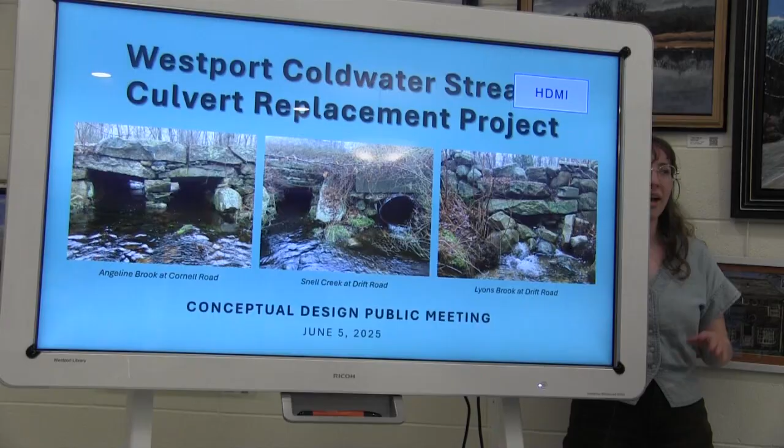Great. It looks like the screen hasn't connected here. What should I do? Oh, if you hit the input, the bottom button right here. Oh. I guess we operated here. Do you stand out there? I think if you just stand back here. Okay. Yeah, back here.

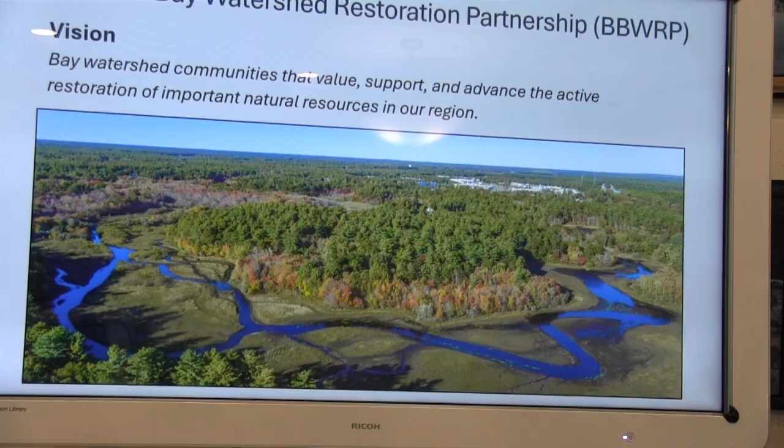I want to give a little bit of an intro of how this project came to be and what got us to this point. So this project is part of the Buzzards Bay Watershed Restoration Partnership. It's a bit of a mouthful, so you'll hear me refer to it as the partnership. Our goal is to see Bay watershed communities that value, support, and actively advance restoration of important natural resources in the region.

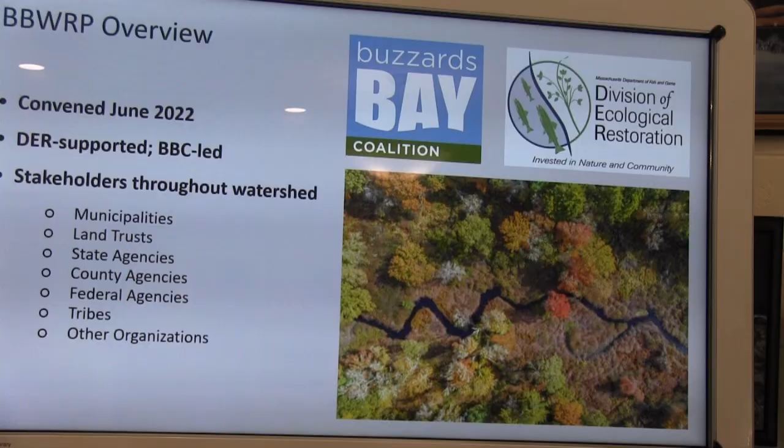So the partnership began in June of 2022. It is led by the coalition and supported by DER, which is the Massachusetts Division of Ecological Restoration. But the real meat of this partnership is all of the stakeholders that are involved. So we have municipalities, land trusts, state agencies, county agencies, federal agencies, tribes, and other organizations. And in each project, it's a different set of partners, but many of them overlap, and they all help to raise up those projects, and we look for ways that we can work hand in hand.

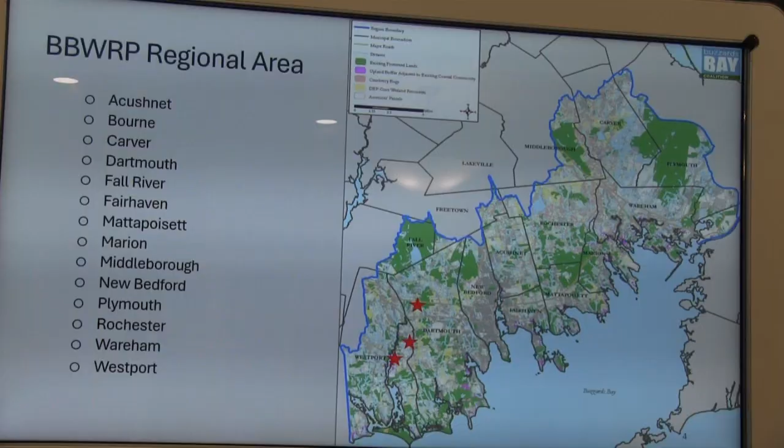So when this partnership was started, we're looking through the Buzzards Bay regional area, so anywhere in the watershed where water is eventually ending up into the bay. So this is all the towns shown on the map, and we looked specifically for two things that entered into what we call a prioritization model to show us what kind of projects rose to the top. So the first thing is we're looking at the restoration potential of these projects. For example, in Westport, in these cold water streams, we have really great opportunities for fish passage, specifically American brook trout. And that brought us to an ecological restoration standpoint.

But the second thing that really is part of the prioritization model is looking for partners such as the town of Westport who are looking for projects that are a priority on their end as well. So with these three culverts, they are in different stages of deterioration, and so it's one of the priorities for the town as well. And so those two things brought these three culverts to some of the top culvert replacements in the region. And so, you can advance it.

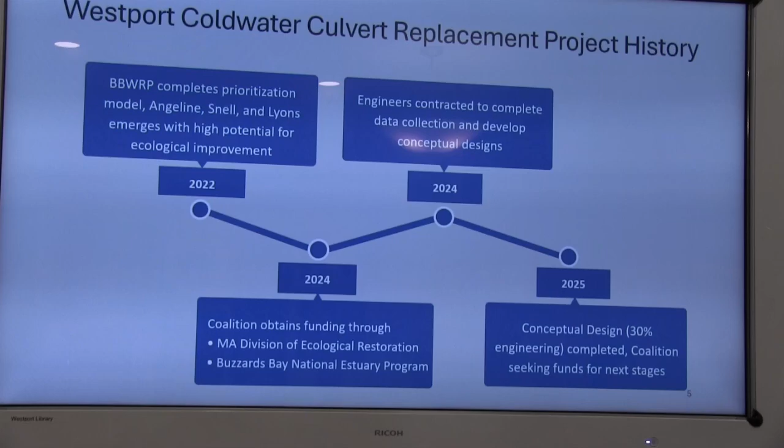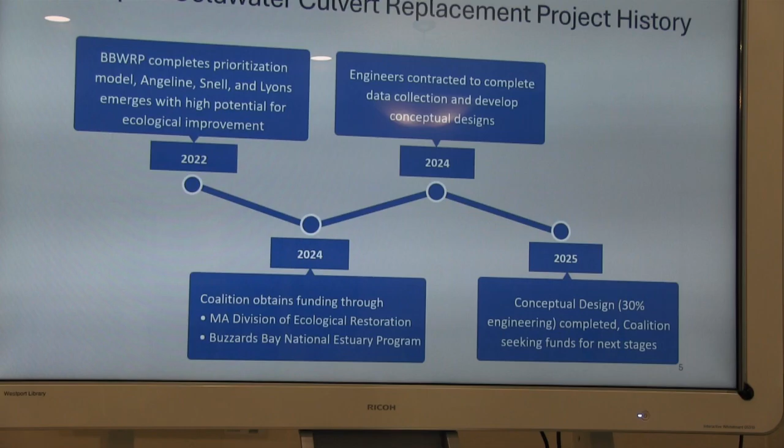So just to walk us through the timeline here, in 2022, we completed that prioritization model with Angeline, Snell, and Lyons emerging to the top. In 2024, the coalition obtained funding through DER, the Division of Ecological Restoration, as well as the Buzzards Bay National Estuary Program. That money enabled us to complete initial data collection and look at conceptual design. So this is about 30% engineering. And so that's Jill for us. This is Jill Griffith. She's going to be presenting tonight on that information. And on our end, we will be looking for the next series of funding for this project, but that's getting ahead of ourselves. I'm going to pass it off to Jill.

Sure. Hi, everyone. Thank you, Evelyn, Michael. I'm Jill Griffith. I'm a water resources engineer with Gomez & Sullivan Engineers, and I've worked on a number of these culvert replacement projects throughout Massachusetts that are designed in accordance with the state's stream crossing standards to be larger structures to accommodate both ecological and fish passage goals, as well as improve storm resilience.

I'm just going to go back to the title slide to show you the 3 sites that we studied as part of this project. Is it okay if I stand here? Can everyone hear me? Okay.

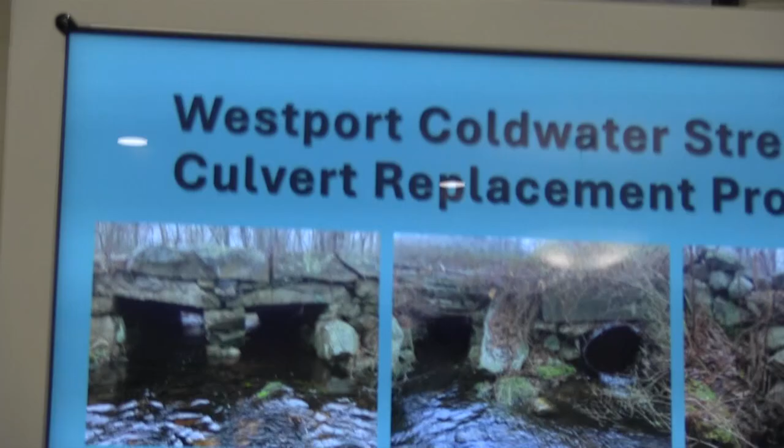On the left we have the Angeline Brook crossing at Cornell Road, and then 2 crossings on Drift Road: Snell Creek going under Drift Road, and a little farther north, Lyons Brook. So those are the 3 crossing sites we'll be talking about.

Just to give a little overview of what I'm going to talk about—Evelyn already covered it pretty much—but the project partners and funding sources for this phase, the purpose and goals of the project, a little bit about the watershed, what exactly we collected for data, what our analyses involved, and then I'll show you the conceptual designs we came up with and talk about next steps.

As Evelyn mentioned, there's the partnership, and specifically in this phase, the town of Westport, Buzzards Bay Coalition, the Estuary Program, and DER were involved in either the partnership or funding.

As I mentioned, the purpose of this project is to replace these 3 culverts. They are deteriorating and in very poor condition. They are undersized, meaning they don't fit the appropriate storm flows through them that culverts are supposed to be designed to pass. So that's the problem, and the purpose is to replace them with larger structures designed in accordance with the state's standards for stream crossings.

As far as fish passage and ecological considerations, a number of the outlets are perched, which means the opening is above the bottom of the stream channel, and often there's no water there, so the fish and other organisms can't get through the culvert.

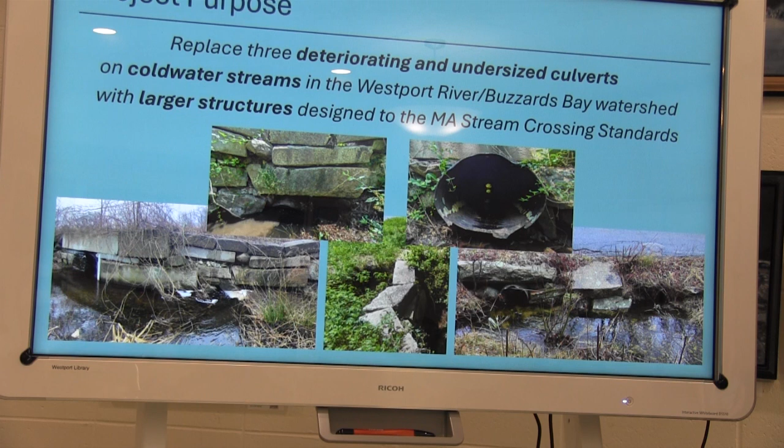Many of them are very small, undersized, as I mentioned. This is Lyons Brook—you can see it's very shallow depth to the top of the road, so it frequently overtops, as many of you know, I'm sure.

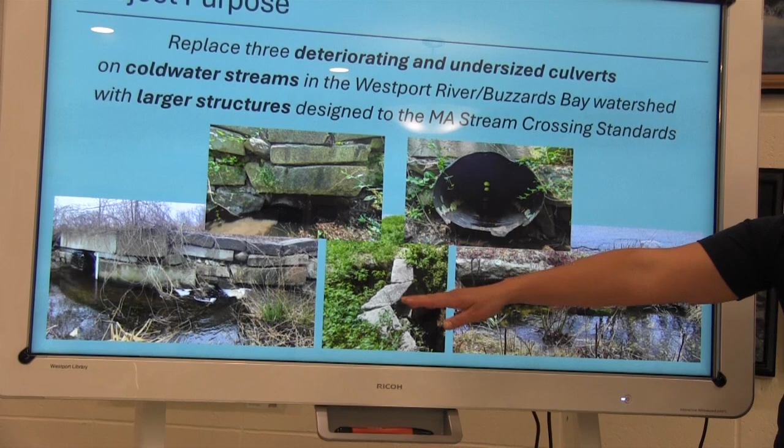This is Snell Creek, and this one is in very poor condition. You can see the headwall is comprised of a hodgepodge of different granite blocks and concrete blocks, which are being undermined from behind. This is a sinkhole on the landward side behind that wall.

Many of them are submerged or blocked, so they're not getting the full capacity that was originally intended. So those are some of the problems.

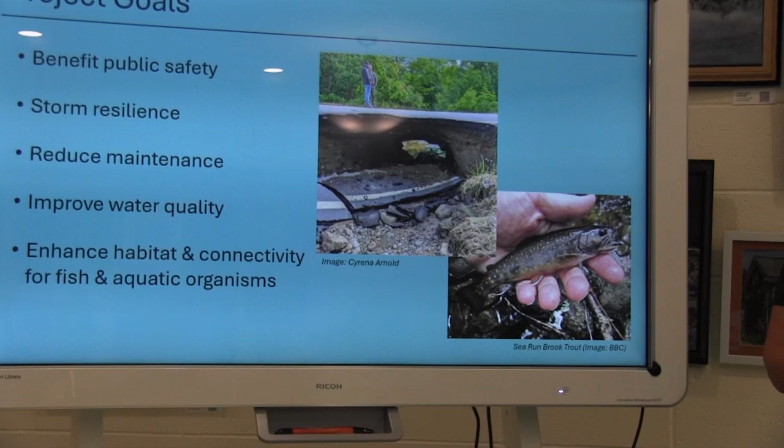As part of this project with the replacement structures, some of the goals and benefits we anticipate are, first and foremost, a benefit to public safety. These culverts can fail, and it can often be catastrophic.

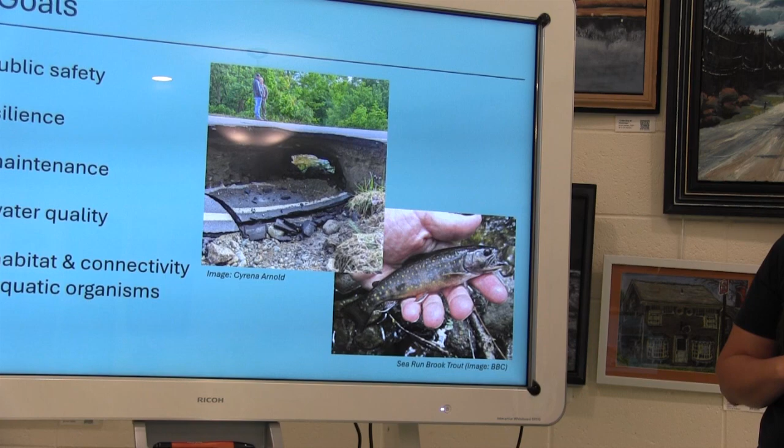This picture is actually from my hometown just last week. I had to throw it in because this is a state road, and we got 4.5 inches of rain in an hour and it just washed the culvert right out. So that can happen even on bigger maintained roads and with these smaller undersized pipe culverts.

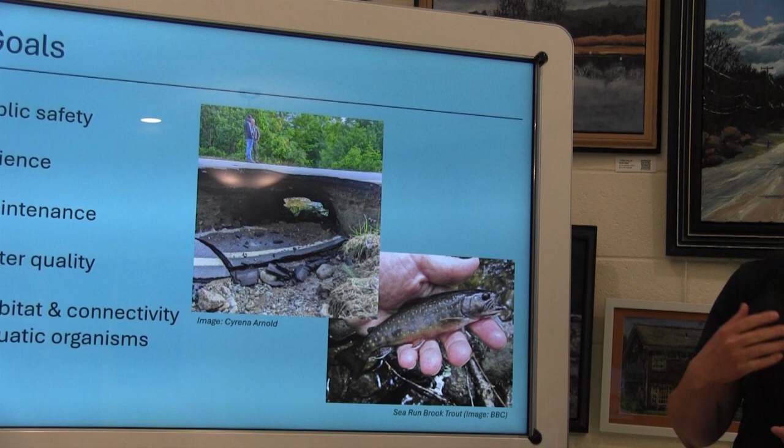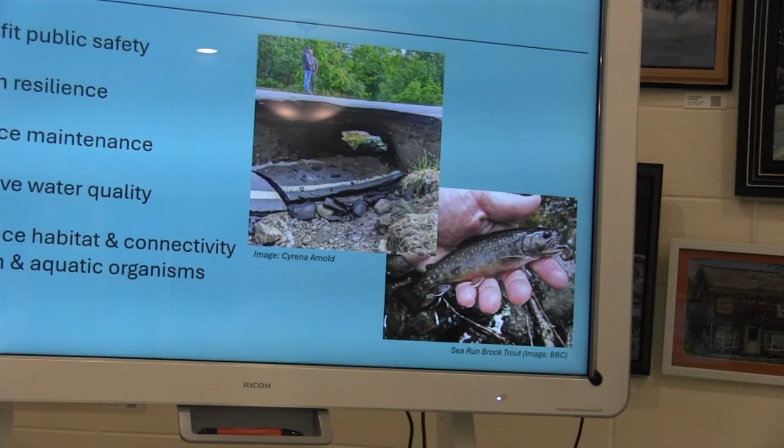It can happen unexpectedly and cause outages of utilities—there are gas lines in these roads—and also closures of the road while a new culvert then has to be designed and installed, which can be a longer outage than if it was properly planned.

By replacing them with larger structures, there will be increased resilience to larger storms and less overtopping of the road. By not having to deal with these washouts or even more minor washouts, it's less maintenance and cost for the town and the taxpayers.

Improved water quality—I'll show a little more on the next slide—but these small undersized culverts can cause water to back up on the upstream side, which can make that water stagnant and warm. As Evelyn mentioned, these are designated cold water streams, a special designation from the state, meaning they're protected and have nice, clear, cold water that supports various species, such as the sea-run brook trout that Evelyn mentioned.

Other species that could be present include American eel and sea lamprey, as far as species that migrate and need to move back and forth between freshwater and saltwater environments to complete their life cycle, as well as other aquatic species that just live in the freshwater streams.

So it will improve water quality by opening that up, reducing the stagnation and reducing the siltation and erosion around the culvert, and we'll also be addressing some stormwater as part of the project. Lastly, due to that and the overall connectivity, it will enhance habitat and passage for fish and other species.

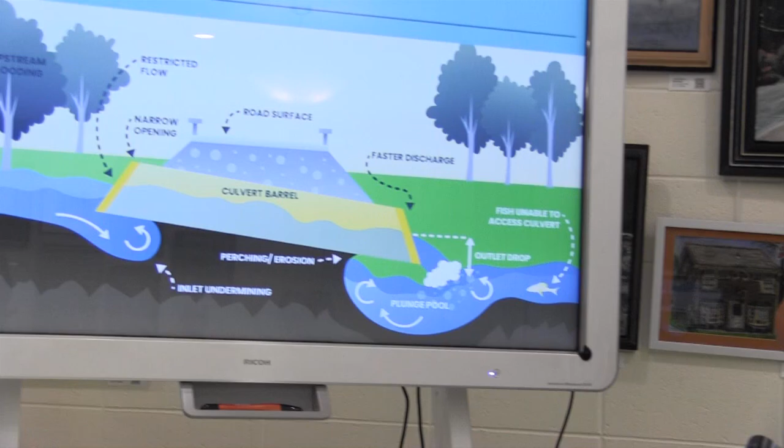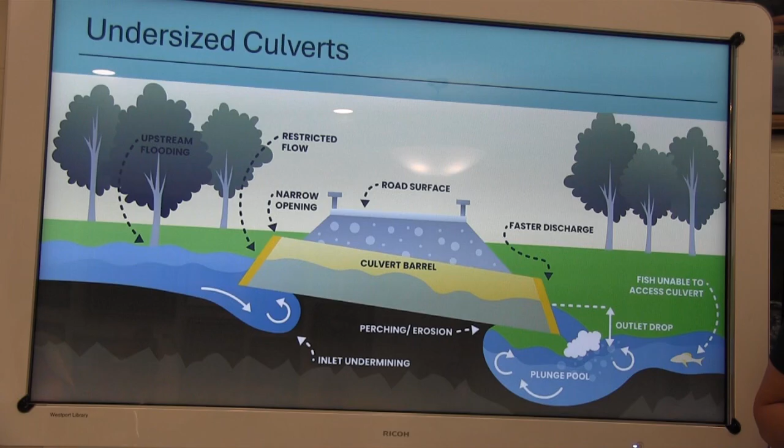Shifting now to zoom out to the watershed for context: this is the Buzzards Bay watershed on the left, zooming into the Angeline Brook watershed here. The culvert is down here and goes into the Westport River, while the Snell and Lyons Brook crossings are smaller watersheds that go into the East Branch.

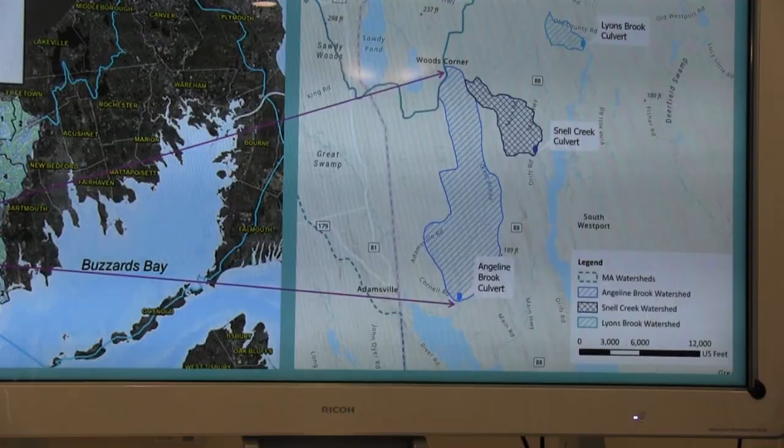So, first, in order to understand how to design these culverts, we went out in the field and collected some data.

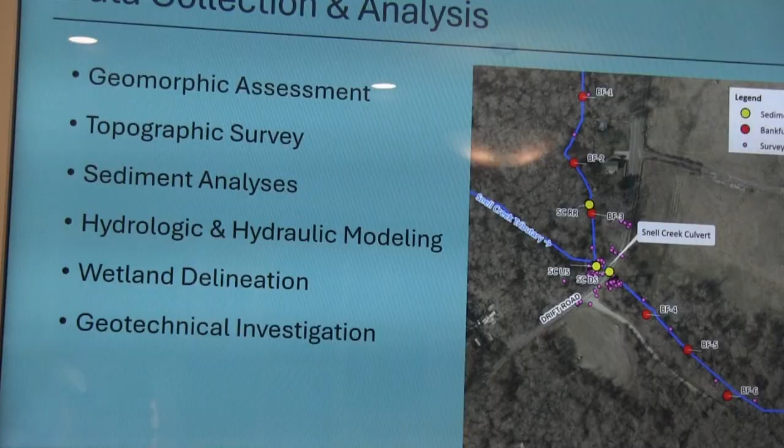We went out last summer and collected different types of data on the streams. We did wetland delineations, and we used survey equipment to measure elevations of the channel and surrounding land. We surveyed cross sections across the river channel to see what the channel shape was like. We collected sediment, the substrate on the stream bottom, whether sand, gravel, or cobbles, looking at it right at the culvert and further out where the stream was more naturally functioning, so we could replicate that material in the redesigned crossing. Finally, we measured bankfull width.

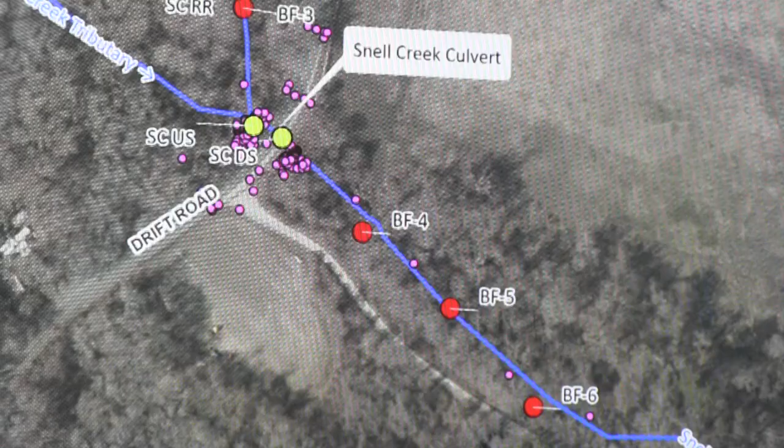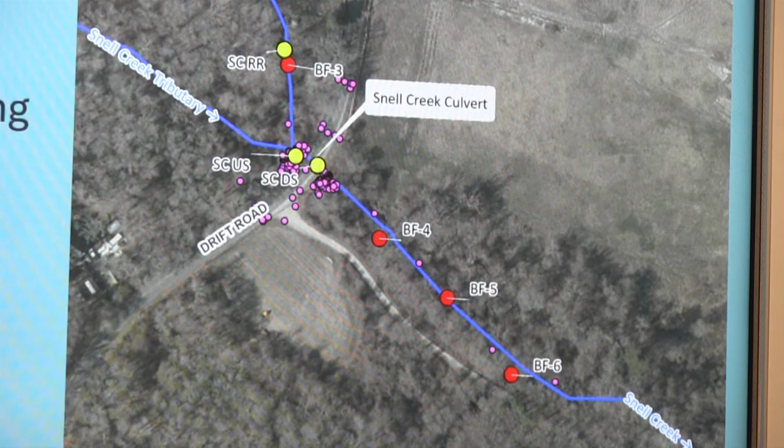Bankfull width, which I'll talk about more on the next slide, is the appropriate width the channel is supposed to be and that the crossing should be designed to accommodate. We also did a geotechnical investigation—some of you may have seen the drill rigs out there earlier this year, in February I believe—basically drilling into the road shoulder to determine the depth to bedrock, which is important for structurally designing the culverts and footings.

I also didn't mention hydrologic and hydraulic modeling, which was very important—we look at the flows coming into the system in the brooks. We have a hydraulic model that takes those flows along with the topography information, the elevations and cross-section shapes we measured, and puts it all together to tell us what the water surface, velocities, and various parameters will be throughout the brook.

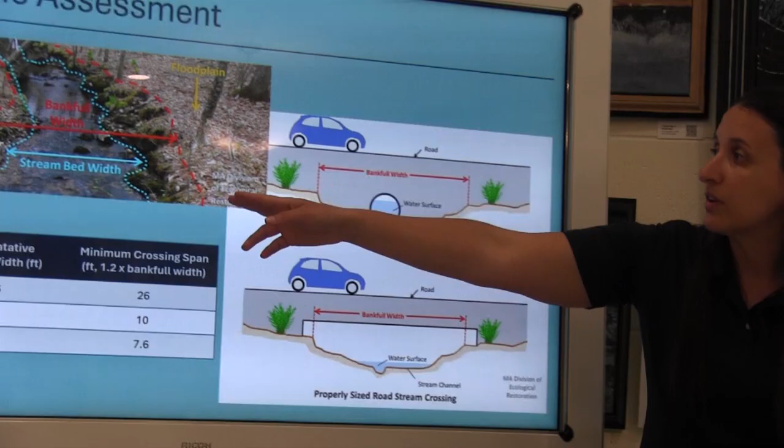This shows a bit more about bankfull width. In this photo of a typical stream, you might think of the stream's width as the wetted area you see under normal flows. But when flows get higher, when the stream is flowing full up to the tops of its banks but not overflowing onto the adjacent floodplain, that's called the bankfull flow. It's important for people who study rivers and design channels and crossings because it's referred to as the channel-forming flow.

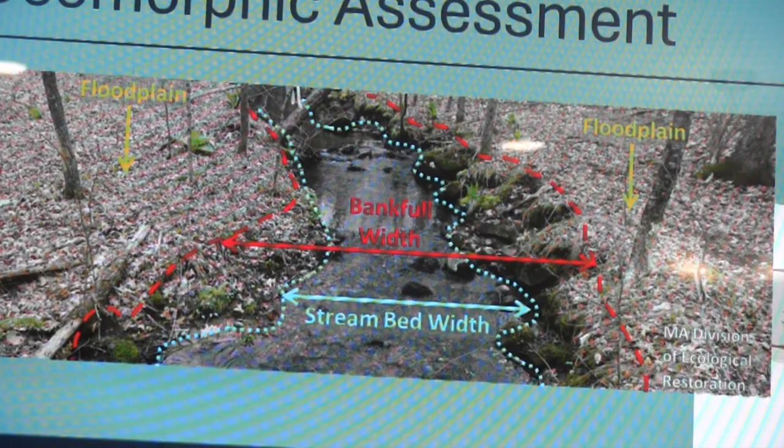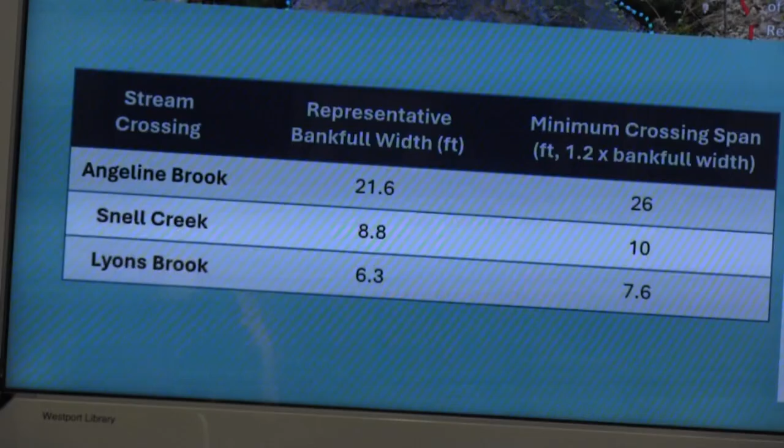At that flow, the stream has the right combination of forces to move and settle out different sediment throughout the system, which defines the shape of the stream. So the state's stream crossing standards use that parameter as a requirement—any new or replacement culverts designed in this state, unless it's an emergency situation, typically have to be designed to accommodate the bankfull width plus an extra buffer of 1.2 times the bankfull width.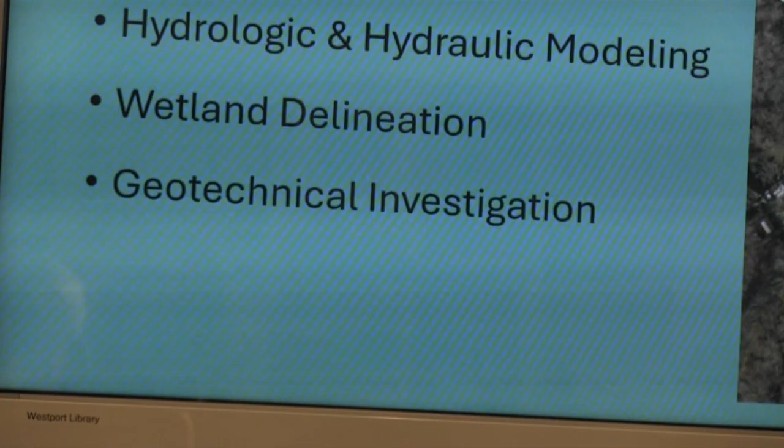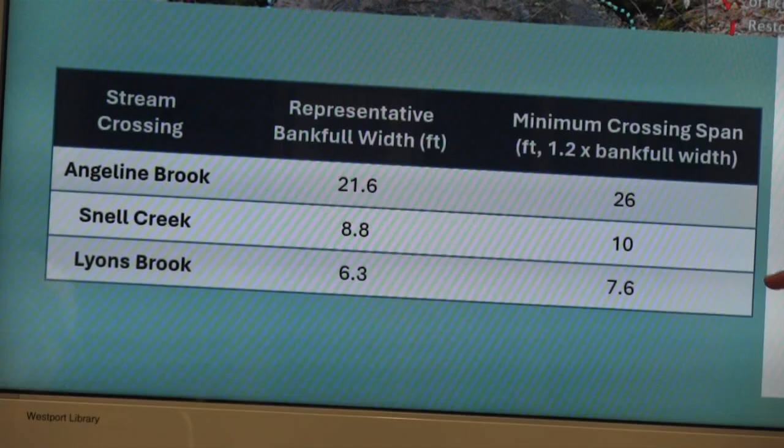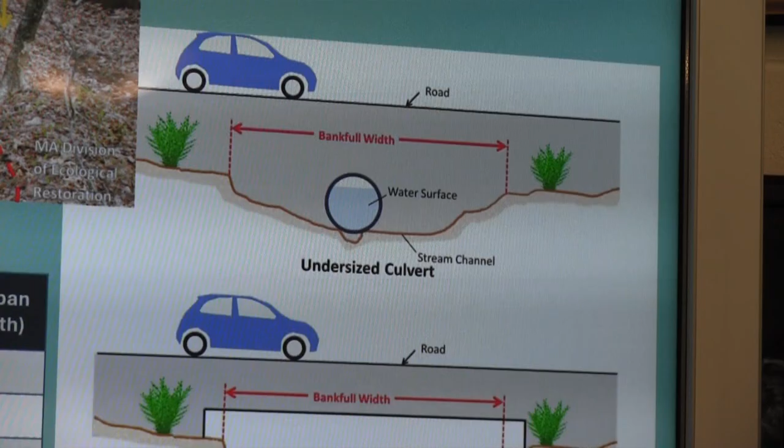So as I mentioned on the previous slide, we took at least 6 measurements of bankful width throughout the stream, averaged them, came up with a recommendation of a representative bankful width, and then multiplied that times 1.2 to get our proposed stream crossing widths. So that is what the new culvert widths will be. The existing culvert pipes are typically 2, 3, some are 5 feet wide, so definitely a drastic width increase there to allow more storm flows.

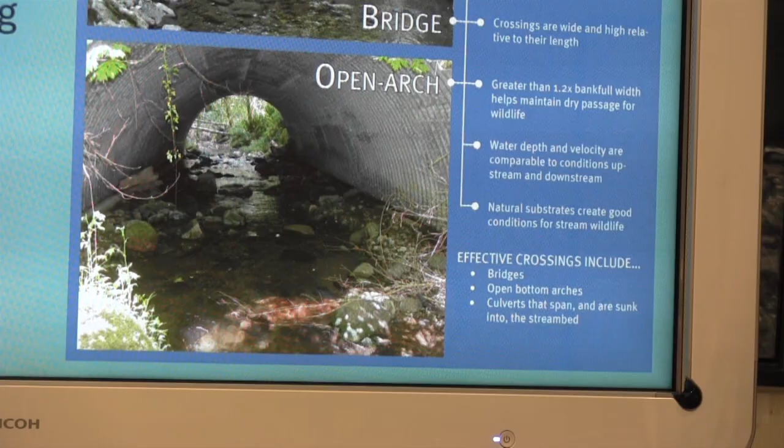So I've been mentioning the stream crossing standards, so just to dive into that a little more. As I mentioned, it is required for any new or replacement crossings. There's the reference to the code, and you have to show that you're meeting it to the maximum extent practical, and you have to look at various different metrics, including engineering costs, different constraints of the site, etc.

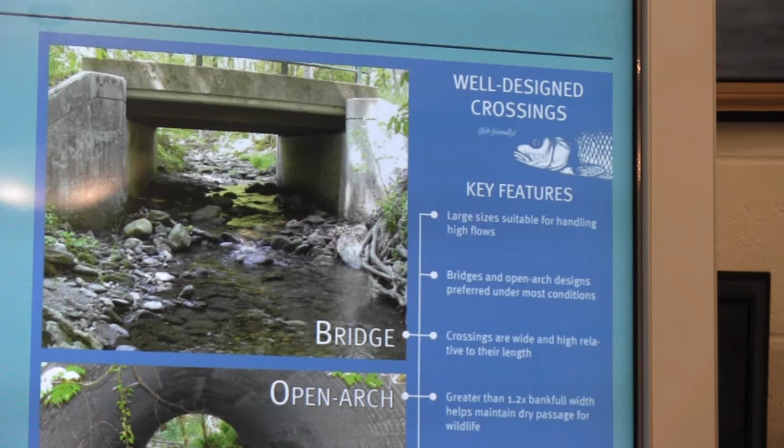So what the standards require: there's a number of criteria that you have to try to meet, and first and foremost is the type of crossing. A lot of these existing structures are pipe culverts, just kind of stuck in the road, with no natural stream material or anything like that within the culvert. Some of them do transition partway through the culvert. Some have a pipe on the upstream end, then an open bottom, kind of old stone culvert on the downstream end.

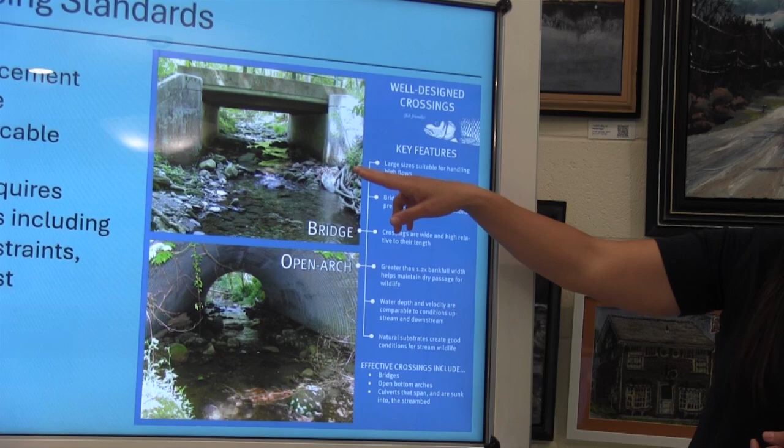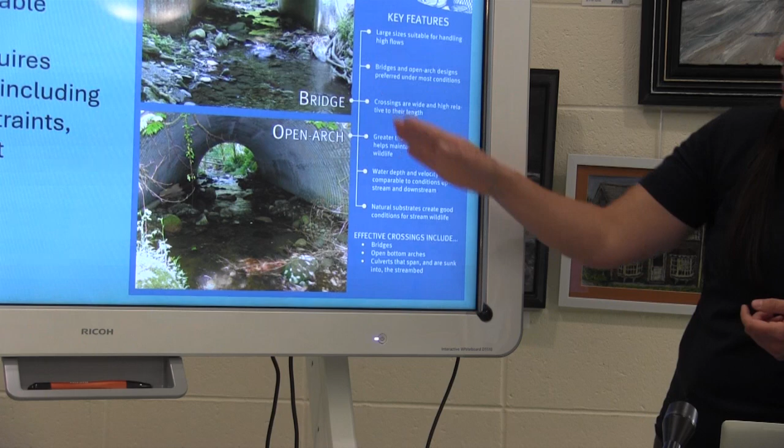So some of the preferred crossing types under the stream crossing standard are anything with an open bottom, so a natural stream bottom, as you can see in these photos. This one is a common design, called an open bottom box culvert, a concrete structure that has 3 sides and no bottom, so it's natural stream bed through the structure. Down here, it's a similar situation, but it's a corrugated metal arch. It can be a little more cost effective sometimes. This one has more longevity, so you kind of weigh both options.

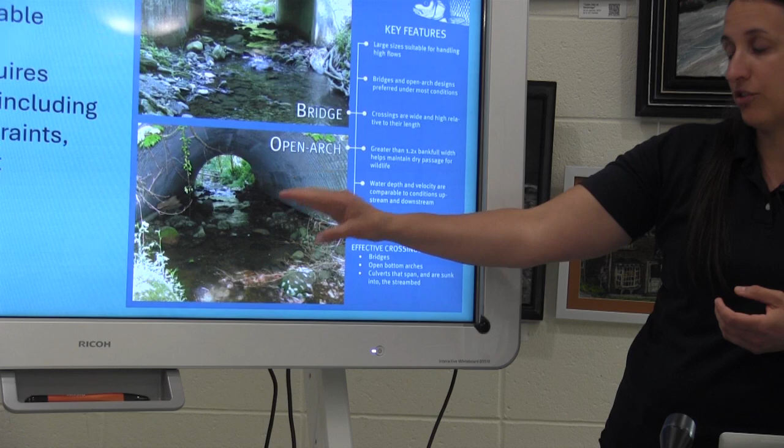Other types, you can do an actual full pipe, but you have to bury it to the point that you're getting at least a certain amount of stream material in the bottom. So imagine if this was a really big pipe, it's buried so that about a third of it is full - that is acceptable as well, but it can be hard to achieve. You'd have to dig really deep and it can't be accommodated at all sites. So these are the typical 2 types of crossings we're looking at, and this really is the preferred one for most projects.

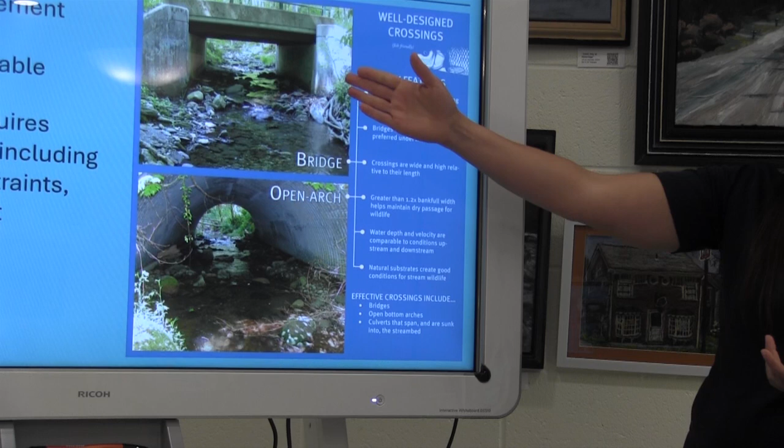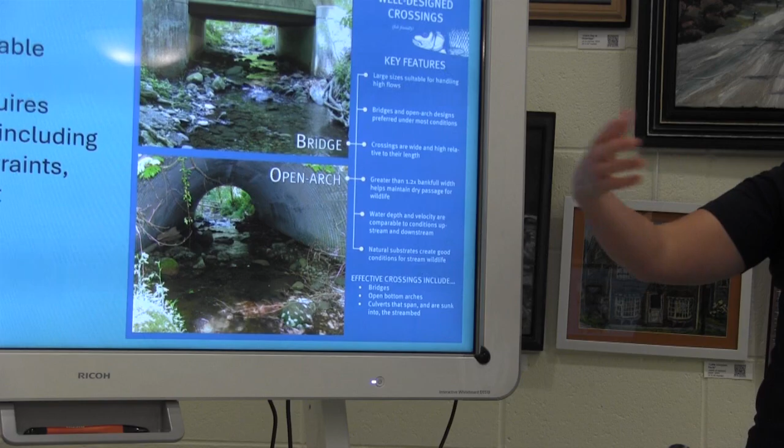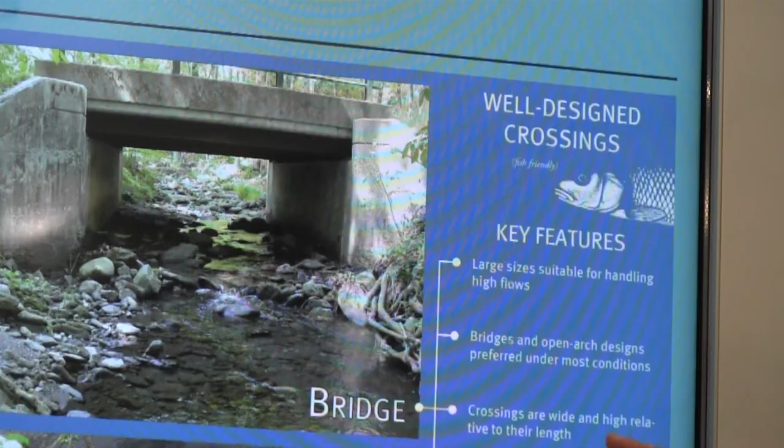You also have to look at how open the structure is, a certain ratio of cross-sectional area versus its length, and the bankfull width, as I talked about. You need to look at water depths and velocities and make sure they're comparable to other areas of the stream that are more naturally functioning, and the substrate that I talked about before. So whatever combination of cobbles or gravels or whatever you're seeing elsewhere in the stream where it's functioning naturally is what you want to design to place through here and have it be stable, so it doesn't all just wash away under the first storm. You have to design all that so that it's going to remain stable and get established like you can see here. So I think that's about it for the standards.

So now we'll get into the conceptual designs for each site. These are a little hard to look at - they're engineering plans, but the point of this is I just wanted to show you an overview of the work area involved with each structure.

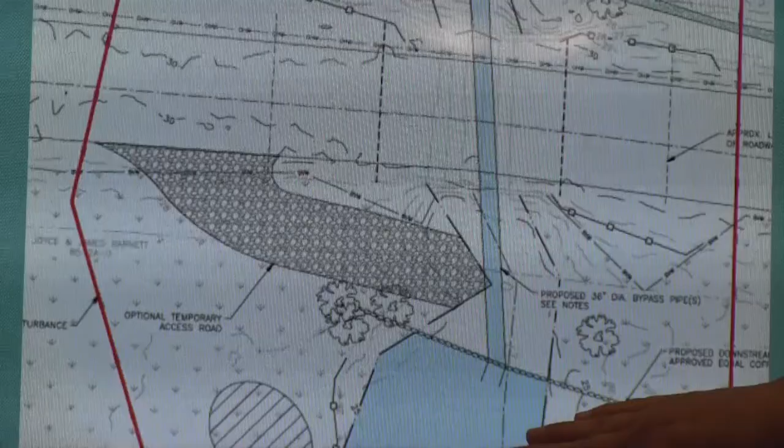So this is Angeline, and this is the upstream end coming through the road and down. It was thinking it looked like it was impounded here - that's because of the cofferdam. So coming downstream like this, and this is the road crossing across here. For the project, it would need to be dewatered to place the culvert. So a pipe would be placed through, and you'd have cofferdams, which are kind of like those big white sandbags that you might have seen at different culvert replacement sites, to dewater this area.

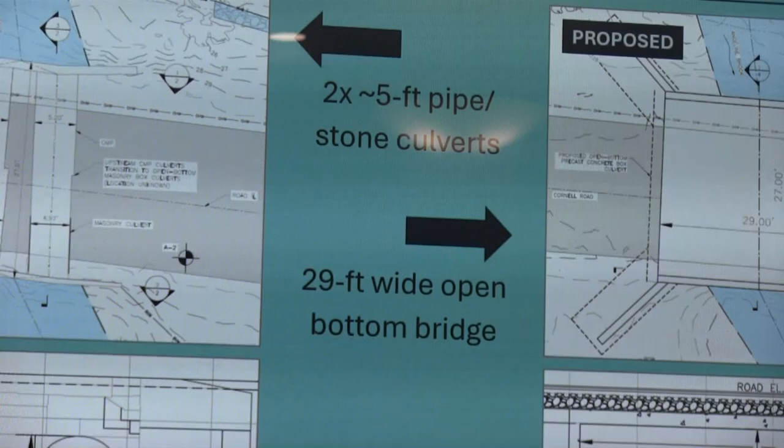This would kind of be just the general work area around that structure. Zooming in to see the proposed design, as I mentioned, the existing has these 2 stone and pipe culverts that are about 5 feet wide each, so about 10 feet total, going to a 29-foot wide open bottom. It will be considered a bridge under MassDOT standards - anything greater than 10 feet is considered a bridge and regulated by their program. So that is what's required here in order to pass the larger flood flows. You can see a cross-sectional view of it here, again showing the existing 2 pipes going to the open bottom.

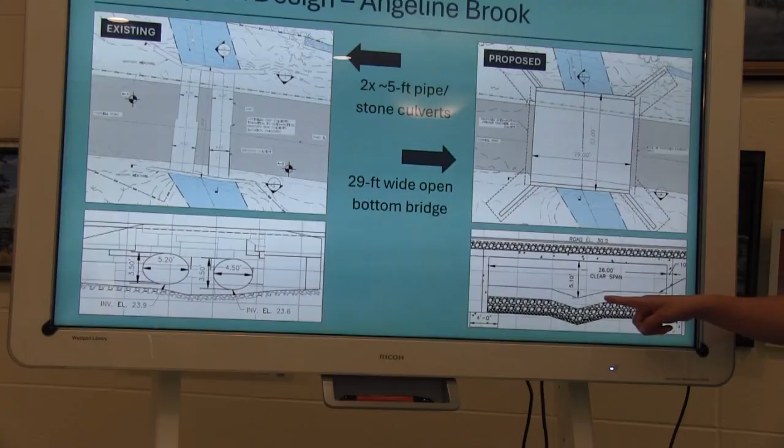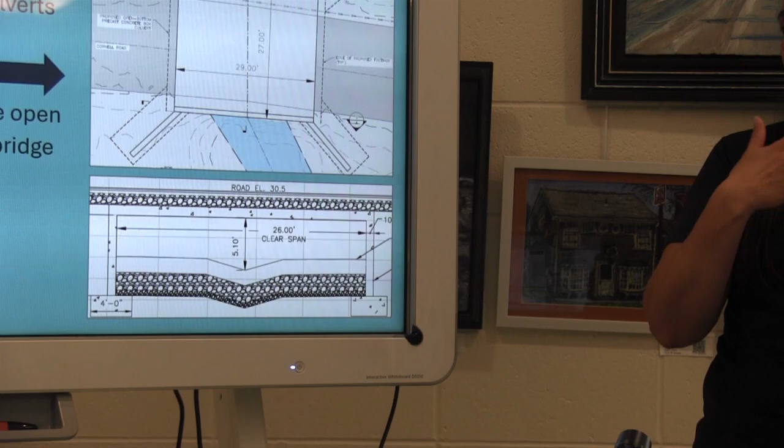And this is the channel bed. It's a little hard to see, but we always like to design what's called a low flow channel in the center, because if it's flat all the way across, during periods of low flow, you'll end up with very shallow depths that won't accommodate fish or other aquatic organisms.

Okay, so that was Angeline. Then moving on to Snell.

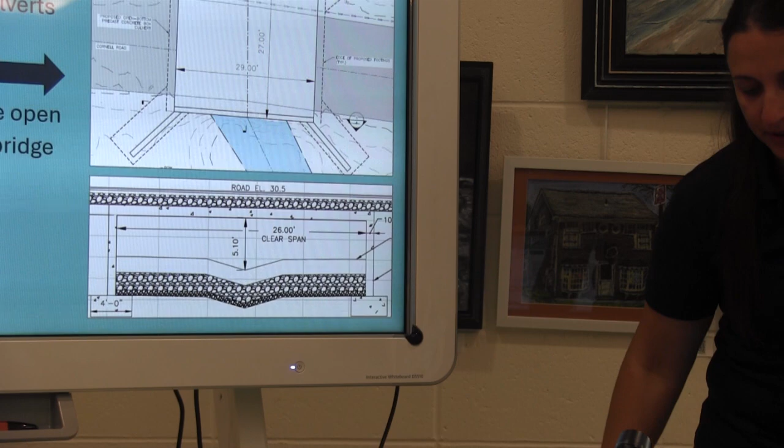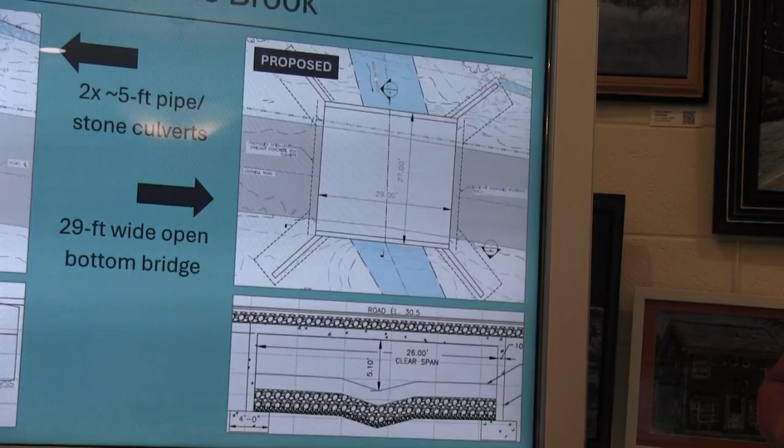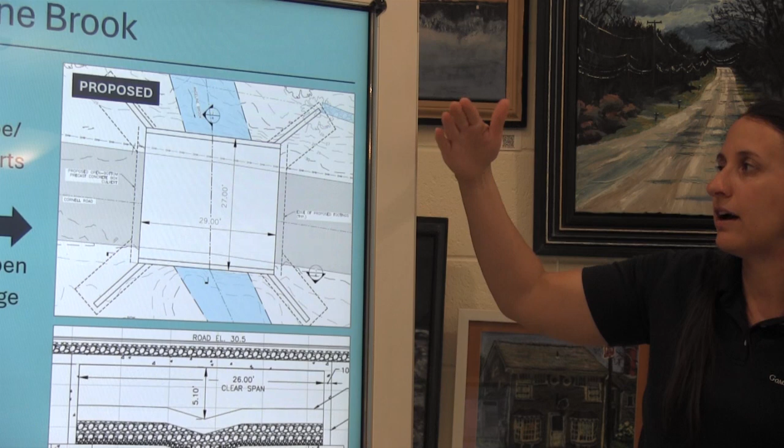Just one quick question. Could you go back? So, I see Cornell Road, and the bridge is built a little wider than the road. Is that, am I seeing that correctly? Yes. The head wall extends beyond, and it allows enough space for a road shoulder and a guardrail, which will be required since this is a bridge, this larger structure. That's why it extends a little beyond.

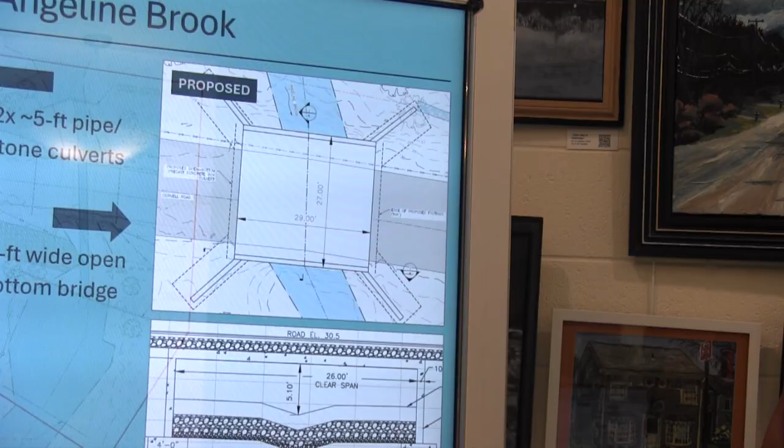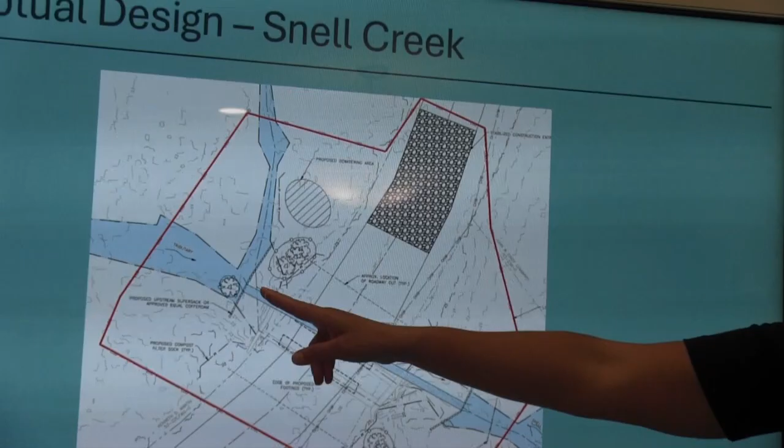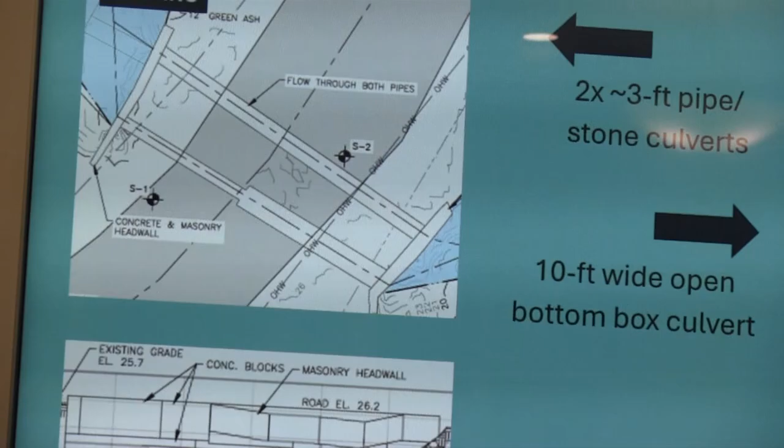Okay, so this one is Snell Creek. And similarly, we have the stream coming in from here. It actually has a tributary which joins it right at the upstream end. And then they flow under the road here and come out. So this is kind of the work area. And then I'll zoom in. You can see the existing two pipe culverts there. There are pipes on the upstream end, and they transition to stone box culverts on the downstream end. And then that will go to a replacement 10-foot wide open bottom box culvert.

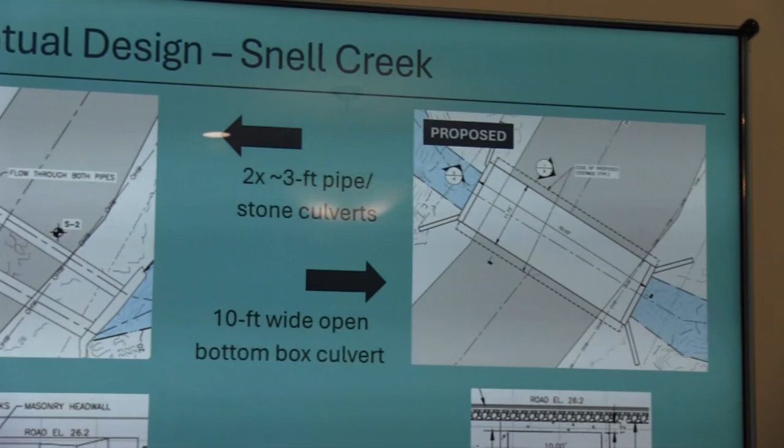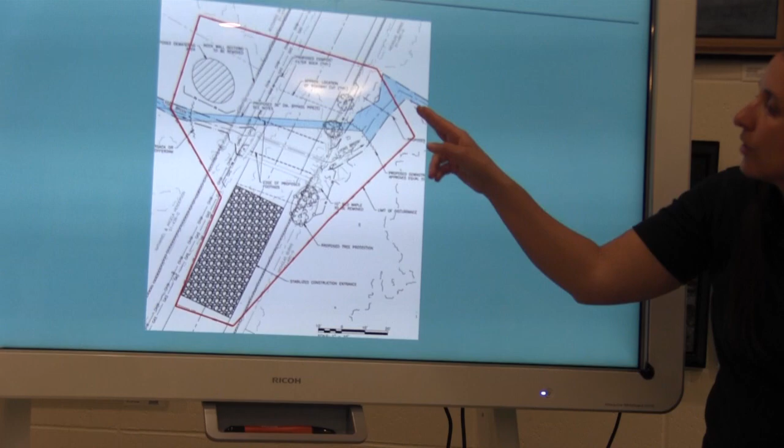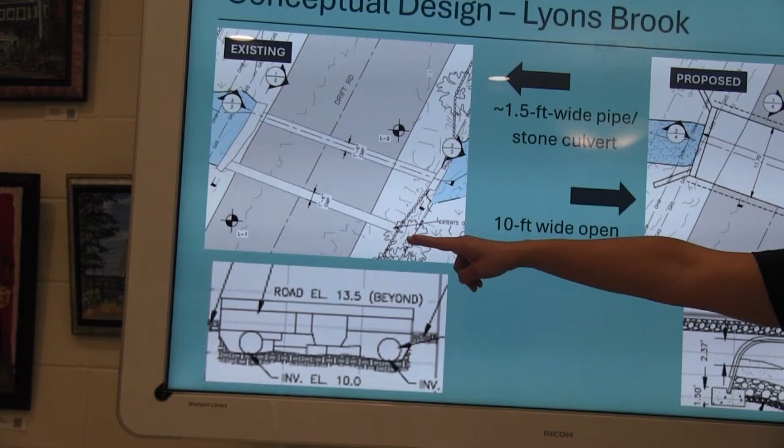And this is the replacement. This one shows two pipes, but actually this pipe is fully blocked, so flow is only flowing through that pipe. You can see that there. And then this would also be 10-foot wide. If you were keeping notes on my earlier slide, I said it only had to be 7.6 feet wide.

But because this one is so shallow, as I showed in that first photo, it's really close to the top of the road. You can't get a lot of height or flow capacity with the minimum culvert size that would be required, and it would still be overtopping the road under certain flows. So in order to get flood flows through the culvert, which is what we want, not over the top of the road, we made it a little wider. We made it 10 feet wide, which is the maximum width without it being considered a DOT bridge.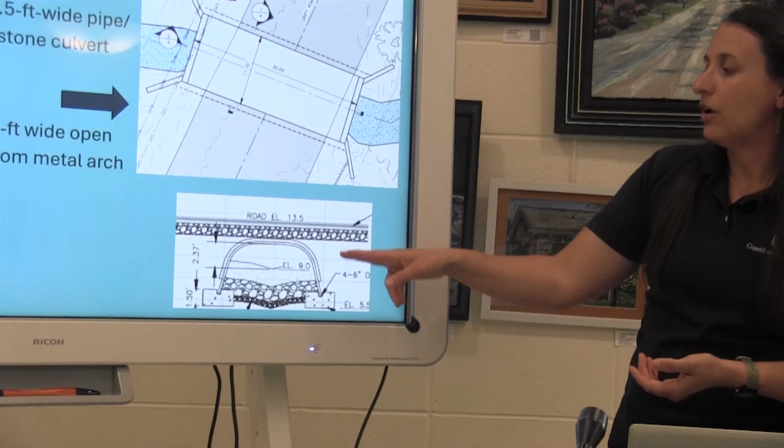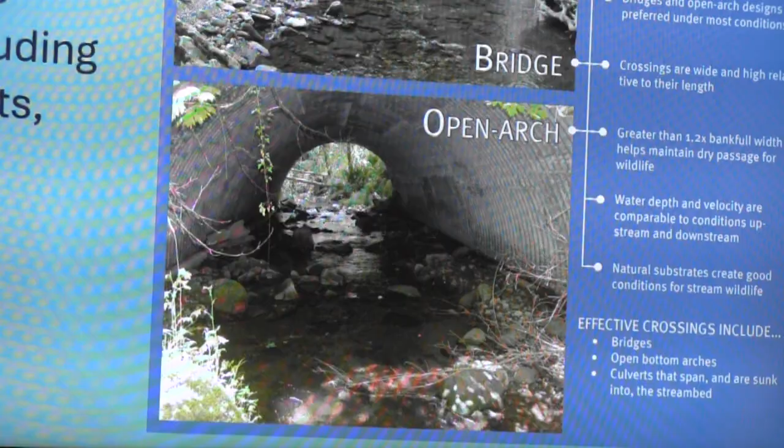And we also made it a metal arch instead of the box culvert that we typically would use, because it's thinner. The concrete culvert requires about a foot thick for the top, so that's taking up available space that could be used for flood flow. This is thinner, so we did that to maximize the opening area for that type of structure. So that's what was proposed there.

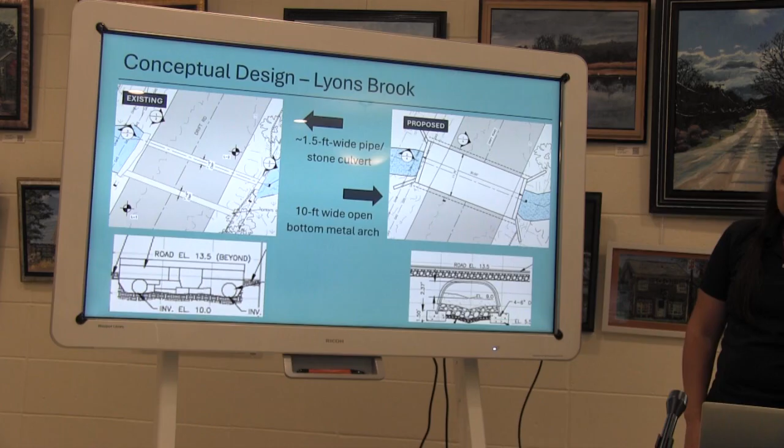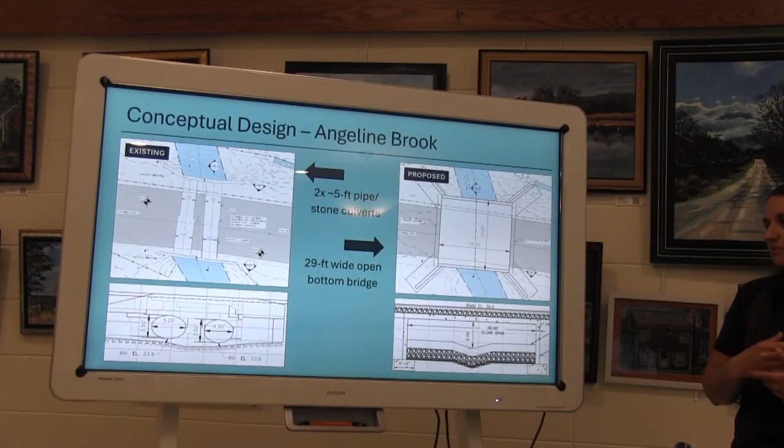Any questions before I move on to cost? Hi, do you recall how much bigger the Snell Creek capacity is going to be over the present? Yeah, so I can talk about that. Each one is drastically improving the capacity. I'll start at Angeline. Angeline can currently pass only the 10-year flood. If you're familiar with it, people talk about the 100-year flood, which is a probability of occurring 1% chance per year. The 10-year flood is a much smaller flood, and that is all that can be passed by the current culverts. We've designed all of these to pass the 100-year flood.

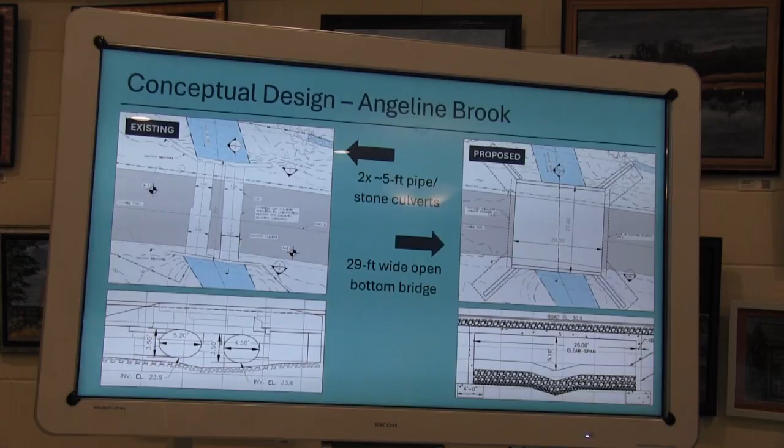Angeline was the toughest one without going much wider. We also like to design them to pass the 100-year storm with some freeboard, so some space, where they're not flowing completely full. And then we check the 500-year to make sure it's not overtopping the road. So that's what we've done here. The 500-year flow is under pressure flow, meaning it's flowing full through the culvert, but it's not overtopping the road.

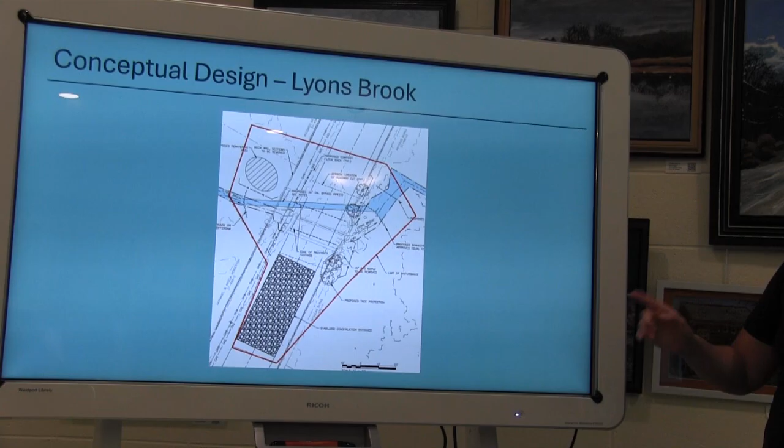The other two pass the 500-year as well, free flowing. So Snell is going from passing the 10-year for existing to passing the 500-year for proposed. And Lyons was even smaller, it only passes the bank full flow. So what I showed you earlier with the channel flowing full, that's all it can pass. Anything larger than that is overtopping.

On the Angeline Brook, there's a drainage ditch that comes down along the north side of the road. I don't see it in the plan, how are you going to accommodate that? Yes, I can talk about that. There's a tiny little corner of it there, so it does come along the road this whole way. Thank you for asking about that, because I meant to mention it.

That drainage ditch collects stormwater and other flow, and it kind of gets stagnant and heats up the water before it goes into the brook, causing flows over the road. So the plan is, before it gets to the brook, to design diversion level spreaders to send the water into the woods more and spread it out so it can infiltrate and become cleaned, entering the groundwater before it re-enters the brook. That's the plan, a pretty extensive project that will be incorporated as part of this project.

I have a question about the area that goes off the road. How far is it off the road? Is it a typical sort of width, can you give me an example of the existing width of road? And then is there any talk about what kind of guardrails, do they have to be a certain type?

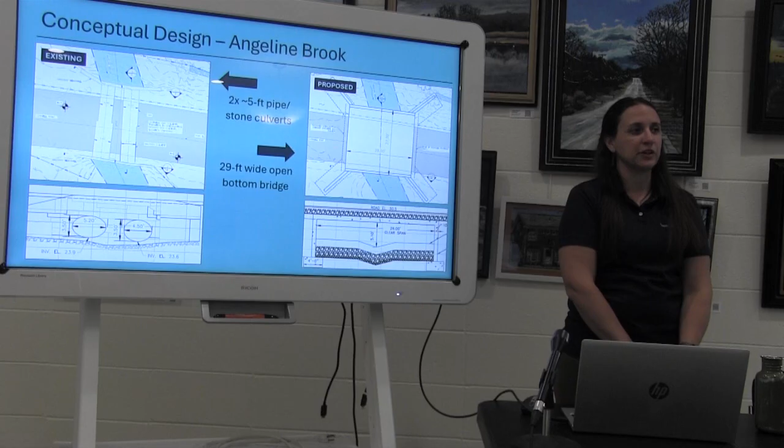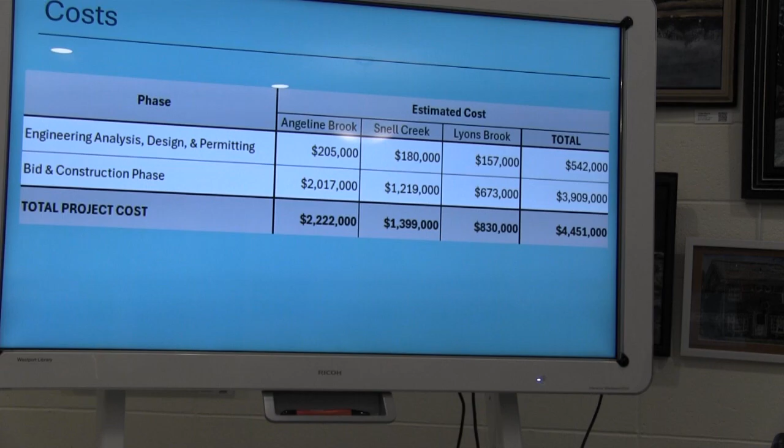Okay, so for project costs, this slide just presents a conceptual estimate of total cost for the project. So the engineering analysis and design, we're partially into that phase, but there's additional work to be done for preliminary and final design and permitting. Then the construction itself, bid, and engineering support during construction are included in these numbers. As you can see, these are not cheap projects, they are substantial, but this is the requirement by the state standards, and by designing it to the state standards, the projects are eligible for grant funding, which is what they have received and will continue to solicit for.

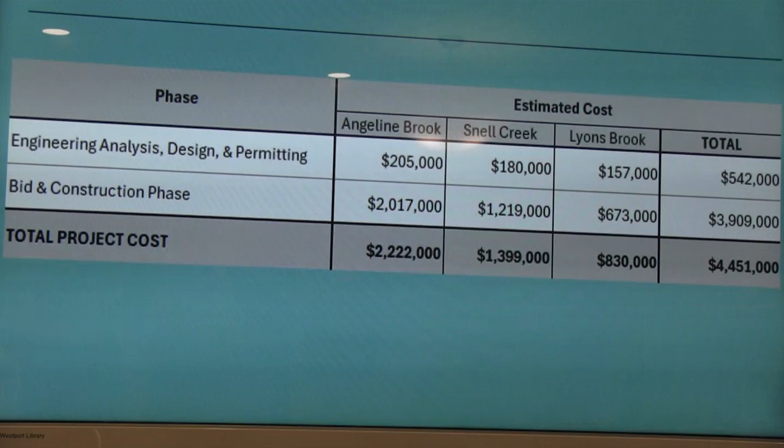Can I ask a question about the funding? In order to get that $4.4 million, we have to do what Mass DOT tells us for the two culverts that are going to be converted into bridges, right? We have to follow everything they say. One will be a bridge, and regardless, it has to follow DOT standards because of its width. All these projects have to be designed in accordance with the stream crossing standards unless they meet a number of criteria, which they don't. That would be the only way they wouldn't have to be designed to those standards.

Is that answering your question? Westport can make a statement and tell Mass DOT, or you, or Buzzards Bay what they want in that bridge from a road passage perspective. Yeah, like aesthetics and stuff. Yep, like that, sure. They can say we want this versus something else. Exactly, and the town is involved at this phase and will continue to be involved in selecting those alternatives, absolutely.

I have a question about the funding as well. How much grant money is coming in and how much town money... No taxpayer dollars are going into these projects. We've continued to receive some funding from Buzzards Bay National Estuary Program. It doesn't fully cover the next engineering analysis, and that's why we will continue to seek grants. One of those grants we've applied for is the Federal Highway Administration, which has a grant for culverts called the Aquatic Organism Passage Grant.

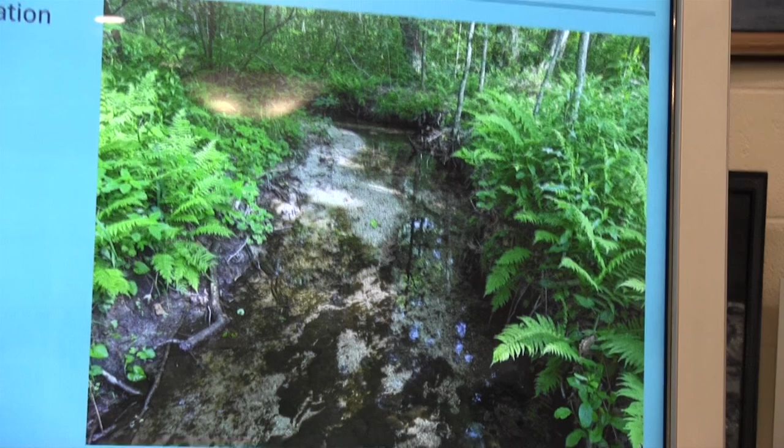And then once that is at about a 75% complete design stage, the project will enter permitting. Permitting in Massachusetts is very extensive. They've tried to streamline it for these types of projects. Most of these culvert replacements can be designated as what's called an ecological restoration project, which affords it some liberties during permitting or some more streamlined steps. But it's still a very extensive process, and it can take up to a year or longer. And so that'll be permitting, and in tandem with that, as we're getting comments from permitting agencies, we'll be incorporating those into the final design plans.

And then finally, when the project is complete and the permits are in hand, the project can go out to construction bid. Construction will be completed. And then also, because it would be permitted as an ecological restoration project, it's assumed it would be required to do post-construction monitoring to continue to check back on the site, make sure that it's not experiencing any issues with erosion or different things that might need to be rectified.

So overall timeline, I would say that the shortest a project could be done is about 3 years, but depending on the grant funding cycles, a lot of grants also require you to have your permits in hand before you can apply for them for construction funds, so sometimes there's a big waiting period between completing your design and permitting and then getting the construction funding.

I wanted to mention something when you were talking about cost to the town. Studies have been done. We've been involved in one economic analysis for DER that showed that these types of larger structures designed in accordance with the stream crossing standards are actually cheaper over time because of the number of times that these smaller pipe culverts need to be replaced, and especially cheaper to towns because they're eligible for so much grant funding. There's typically little or no cost to the towns, whereas the pipe culvert replacements, the in-kind replacements, are all on the town. Plus the cost of the damages and repairing damage to the road and so forth.

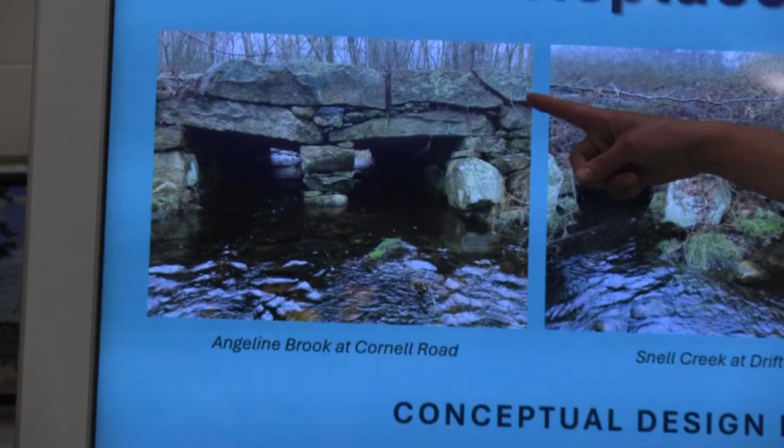So Angeline, are there guardrails and stuff there now? Well, you can see in the photo, there's headwalls. It's kind of like a low granite wall. The plows have begun chipping away. I should have included more photos. That sticks above the road surface about 10 to 12 inches. Just the stones? The granite, it's a little more visible on the upstream end. And that's pretty straight there? It's pretty straight.

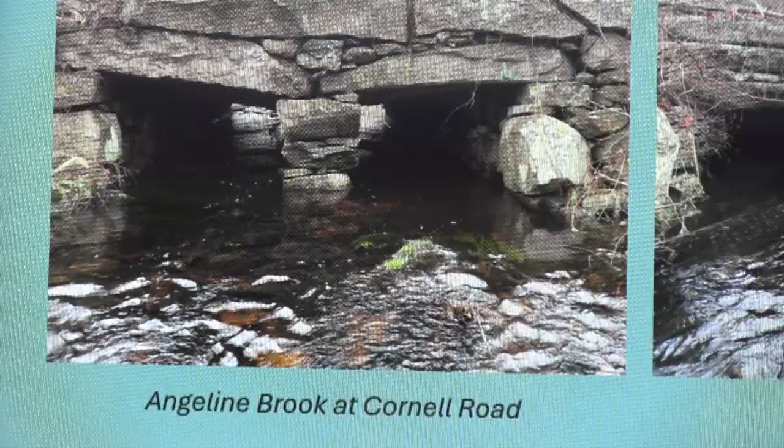So you'll have probably 75 feet of guardrail on both sides. Don't quote me, but you will have guardrail. We want it to be aesthetically pleasing. We had nothing, and we went to 165 feet when the town put the guardrails in 5 years ago. And then when we got the bridge grant, they increased it, so it's like 200 feet or something. 29 feet for the width of the crossing, yeah. Right, and now it's only half that. Well, it's 10 plus the buffer between, so it's probably 15 at least.

So you'll have guardrail 29 feet and probably another 30 feet this way and another 30 feet, so you could be up to 80, 90 feet. That's the MassDOT standard for that. Again, I'm not an engineer, I'm just telling you what I've learned and what we've discussed in my conversation. Yeah, thank you.

Other questions, comments? Thank you very much. Thank you all. Good questions and feedback, thank you. We can clap. I'm sorry for my coughing spell, I'm getting over a cold.